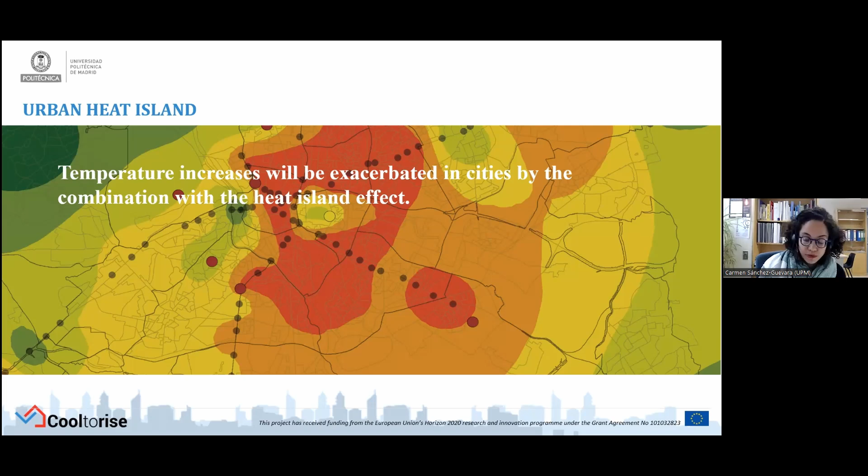So we started thinking, okay, can we find urban areas in which there's a higher risk to suffer from summer energy poverty? Our perspective is always to look at the urban fabric and understand inequalities within the cities, even before we had any indicators. So unfortunately, I'm not going to talk about indicators today, but about the location of this problem, following this approach relative to the IPCC, understanding risk as a combination of exposure and vulnerability.

We thought, okay, what is the risk to suffer from summertime energy poverty? Well, it can be a combination between the exposure of the population and its own vulnerability. So what could be the exposure? Where you live is exposed to a certain degree of this urban heat island. So if you live in the center of the city, during these nights you will be more exposed to these high temperatures. Here we have the urban heat island effect for Madrid, and you can see that during the daytime and the nighttime, it's not a constant effect.

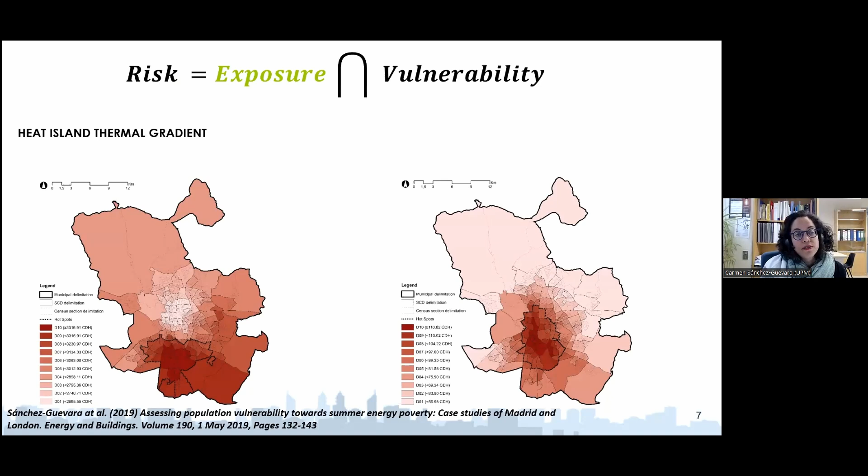So we said, okay, this would be one of the indicators of the exposure, but also the low energy efficiency of the housing. So how housing behaves towards heat. So these two quite simple indicators could compose the exposure, but also we need to consider the vulnerability, and we all know quite a lot about that.

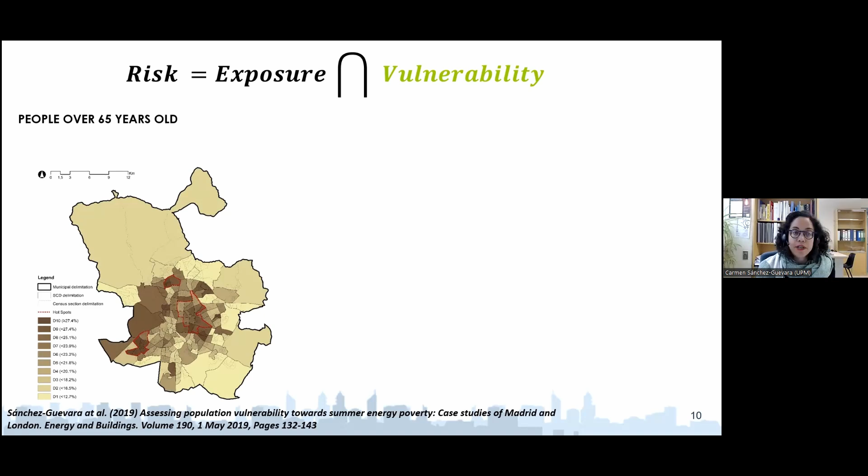What could be the vulnerability? Well, the income levels of the population. So here you have for the city of Madrid, in which neighborhoods those households with the lowest income can be located. And also, learned from our colleagues from the field of epidemiology, we know that people over 65 years old are more vulnerable towards heat, because of physical reasons, basically. So then we said, okay, we can combine this and we can see in which neighborhoods in the city we can locate this summer energy poverty situation.

So here you have the result of where these households with the lowest incomes are living in a low energy efficiency housing stock, and also with a high exposure to the urban heat island, and also where you can find these elderly people in the same situation. And this leads us directly to a certain design of urban policy, which was what we wanted, and also the idea of considering, and this is something important, and now I will leave the floor to Miguel.

This is important for our research and the actions we are delivering: when we talk about summer energy poverty, the evaluation of the problem and also the proposal of solutions need to go beyond the physical limits of the household. What I mean is that generally when we talk about winter energy poverty, we can strictly work on the household and the housing insulation, but the outdoor part of the city, the neighborhood, basically doesn't matter to us to propose effective solutions.

And then we also produce these posters, which are actually the ones I'm going to focus on, because I think they showcase quite well the idea that Carmen was saying before. When we are approaching energy poverty traditionally in terms of intervention in the building, we always think about insulating, right? We isolate the interior from the exterior, and therefore we make it easier to guarantee certain indoor conditions that are comfortable, or at least close to comfortable conditions.

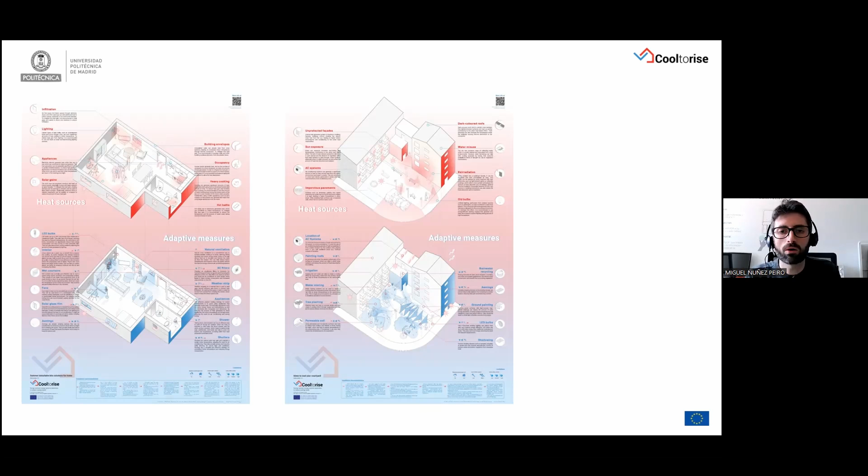When approaching the summer perspective, we have to take into account that we have heat sources inside the house. So it's not going to be enough isolating ourselves from the outside. We also have to have in mind these indoor heat sources, which sources we have, and also put the focus on the outside, on how we can reduce the temperatures outside so we can have an impact inside. Let me maybe zoom in on these different strategies so I can show a little bit more detail about it.

So as I was saying, the building envelope is still relevant, as well as the infiltration levels, as both infiltration and the envelope are important in the wintertime. So we still have to control that during the summertime. But we add on top of that other elements that we have to take into account. If we think about the indoor heat sources, we obviously have to have in mind all the appliances that we have, right? From computers to the appliances that we have in the kitchen, the light bulbs, the TV, any appliance that we have inside is a potential source of heat. So we have to have that in mind in terms of identifying these heat sources. Of course, solar radiation is going to be an added external heat source inside the building, inside the house.

But we also have to take into account how the user is behaving inside, not just because of the presence of the appliances or how they are being used, but also the common behavior inside the house, from the cooking level. We provide recommendations on how to maybe shift the cooking, so shift the recipes that are made in the house during the summertime, so that it's less heat intensive in terms of heat generation, and also in terms of heat gains in the body, right? If we have a heavy digestion, that might also be a heat source, and also, for example, having hot baths during the summertime.

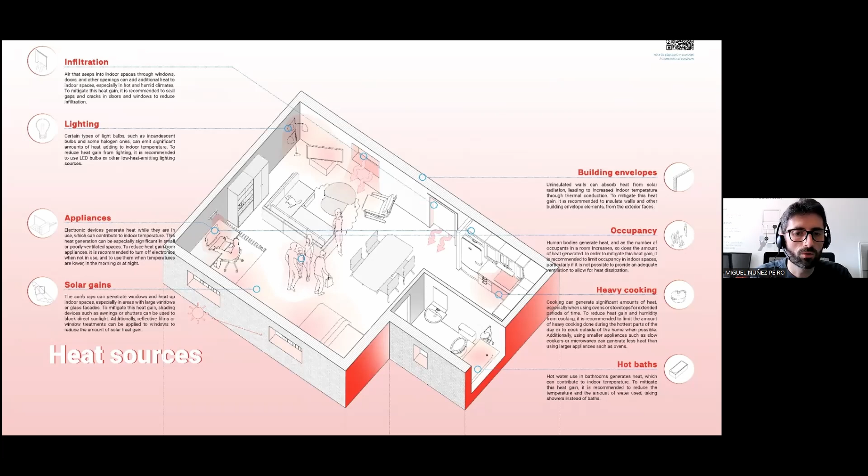In any case, this would be more or less a quick perspective to put a little bit more focus on the indoor gains. But in terms of adaptive measures, you can see that we have different alternatives that we have to incorporate. Of course, the most relevant strategy is to control the solar radiation entering the house. So we have to block solar radiation before it reaches the inside. That means we have to block solar radiation from the outside, not from the inside. Curtains are not the most effective or recommended way to block solar radiation. So it's better to use awnings, or even solar glass films in case we cannot install awnings, maybe because households are in a rental situation.

We also focused on trying to highlight the relevance of natural ventilation or cross natural ventilation. So by letting the air go through the household, opening windows in the different facades, ventilating during the nighttime instead of during the daytime if the outside temperatures are too high, incorporating, if it is possible, depending on the climate background that we have, evaporative cooling strategies such as wetting the curtains, or having interior vegetation that might

increase the evapotranspiration inside the house, so that would help reduce the indoor temperatures, and creating a better circulation of air through the use of fans. But adjusted to where we are, of course. So readjust the perspective on the use of fans, not seeing it as a tool to extract the air from the inside of the house, but as a tool of moving the air or increasing the speed of the air through our skin, so we can increase the body transpiration, and that would help us reduce the thermal

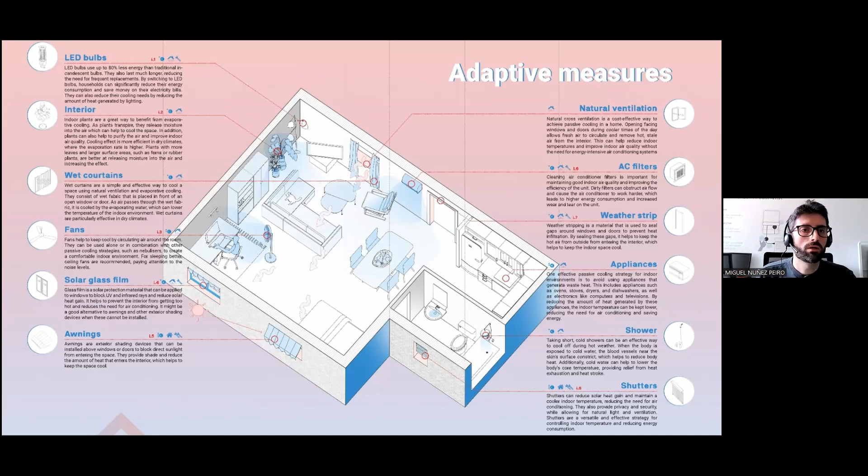sensation. And a lot of different strategies, as I was saying before, related with the use of appliances, with the showering, with the use of shutters. So different strategies focused on reducing, again, the thermal gains from the outside and also reducing the internal gains that we might have. So this is more or less related with the indoor environment. You probably will be quite confident with most of these strategies, or in most of the households there is a common culture that normally has most of these strategies integrated.

What is not so integrated is the outdoor perspective. And in that sense, we like to put a lot of effort on transmitting the relevance of this outdoor space on the indoor conditions. If we have inside the house really high temperatures because of these indoor gains, and we have to reduce the temperatures inside, we have to have a heat sink outside. So in other words, we need relatively cool air outside so that we can remove the heat from the inside. So in that sense, we identified first the most relevant heat sources outside, from the

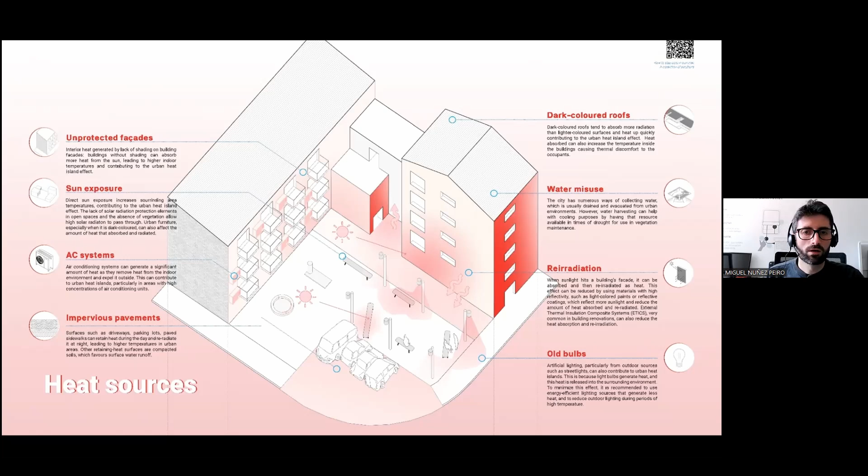unprotected facades and openings in the building, to the type of pavements that we have. Impervious pavements might reduce the capacity of that horizontal plane to reduce the temperatures, reirradiations that might happen within the urban canyon, the dark colored surfaces, both horizontal and vertical surfaces, and of course the presence of air conditioning systems, which although are every year more integrated in housing units, because in some cases it's the only way to stay cool inside, are definitely a maladaptive strategy in the long run, because we are pumping all that heat to the outside through the street level, where we are going to actually try to use that air as well to reduce the temperatures inside.

So regarding the adaptive measures that we can incorporate at the outdoor level, we can start from, of course, the relocation of the AC systems to other places that are not putting the heat into the urban canyon, but also focus on the reflectiveness of the surfaces. So increase the reflectiveness of the surfaces so these surfaces do not absorb that much heat. Increase, of course, the presence of vegetation in order to reduce the incidence of solar radiation both on facades and the horizontal level. Increase the evapotranspiration. So vegetation produces evapotranspiration, which at the end reduces the urban temperatures.

We also focus, in dry climates such as the one that we have in Madrid, on evaporative cooling. So the use of water misting systems, fountains, etc., in order to reduce those temperatures. Focusing on shading as well, and in general, as you can see, a big battery of different strategies that we can adopt in order to adapt our outdoor environment to the situation of climate change that we are in right now.

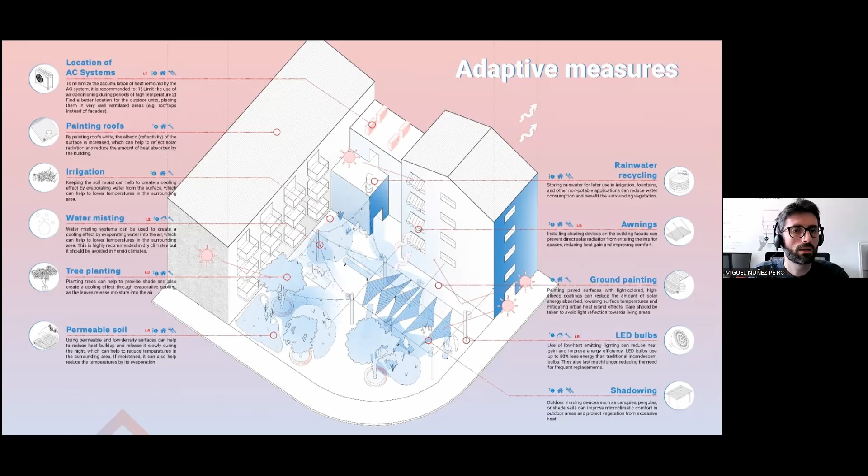So yeah, I don't know if it was too chaotic at the end, but that would be more or less the overview of different strategies that we try to communicate to the households, both indoors and outdoors. And I don't know if you might have some questions, because I think that with that I would finish the presentation.